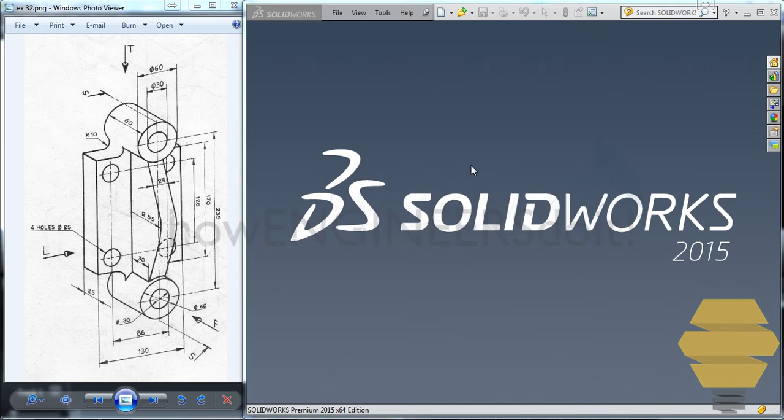In this video, we'll work on exercise number 32. To start off, we'll go to File, New, and open a new part template. Once it's open, let's go to the sketch, select the sketch tool, and then select the plane to start sketching on. In this case, I would select the right plane.

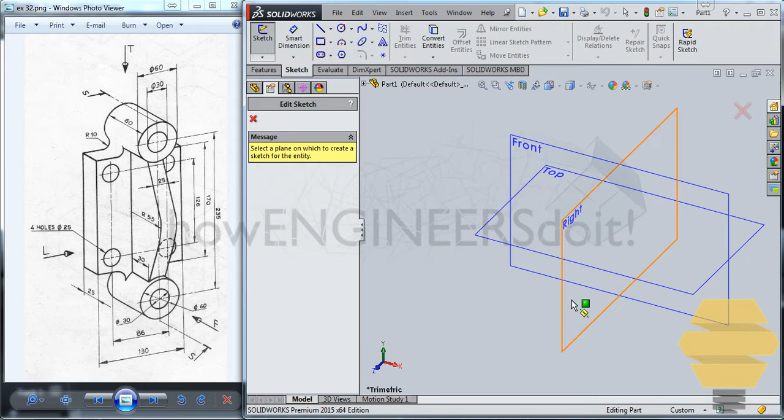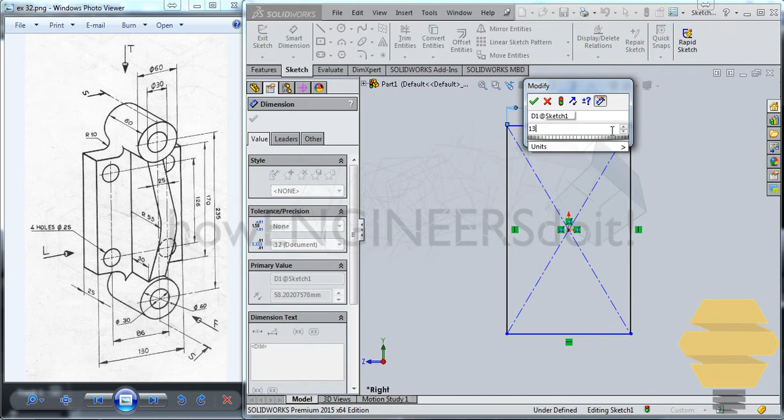Let's start doing the sketch of this particular geometry. Let's go to the centered rectangle tool, click here, drag it outwards, and go for smart dimension. Dimension this portion, that will be 130, and this portion will be 170.

Exit the sketch and then go for feature extrude boss and base, and this thickness will be 25. Double enter will confirm that.

Now we have to create 4 holes, so select this face, go for the sketch again, and then create a circle. Go for the dimension and start dimensioning the circle. That will be, as you can see here, 86, so 86 divided by 2 will be 43. If you're not able to see, this is what I'm talking about.

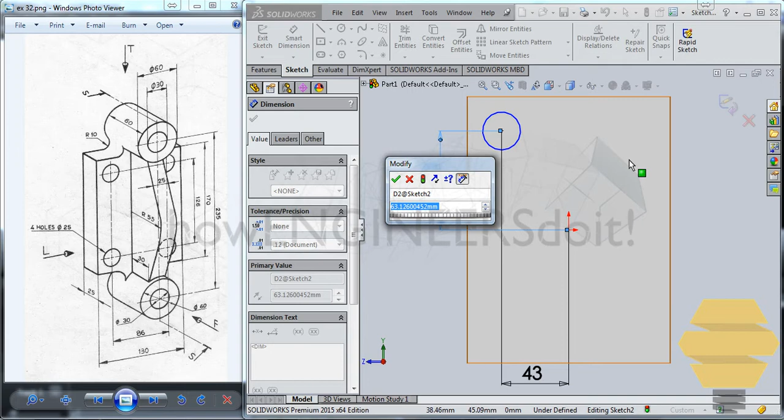Now this is 126, right? So we'll just select the center, and go here and select 126 divided by 2. So we have that circle being placed on a particular place where it is constrained. Also 4 holes of diameter 25, so diameter 25, double enter will confirm that hole there.

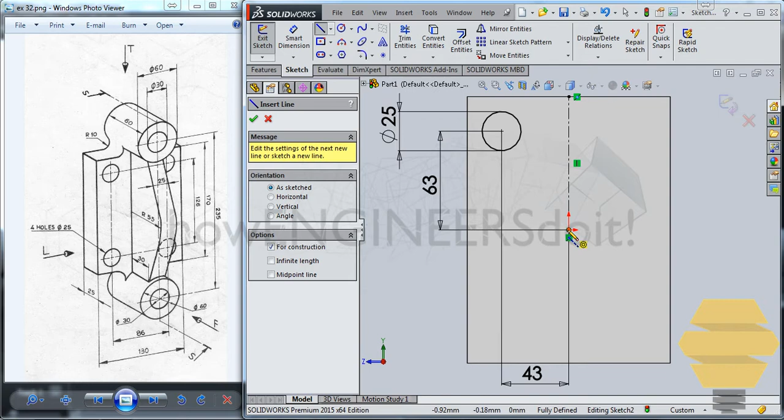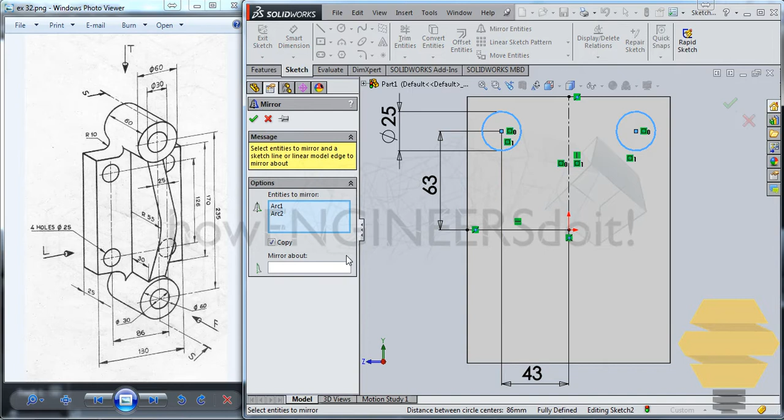Now what we can do is just create axis lines, one, another axis line here, two, and select this circle here and go for mirror entities, select the mirror about, select this, so you can mirror it. Now select these 2 circles here and then go for mirror entities, select the mirror about, and select this axis. Click on the tick mark and all 4 circles have been created.

Exit the sketch now and then go for extruded cut, and go for up to next here. Click on tick mark and that'll confirm the hole. So we have the basic shape here ready.

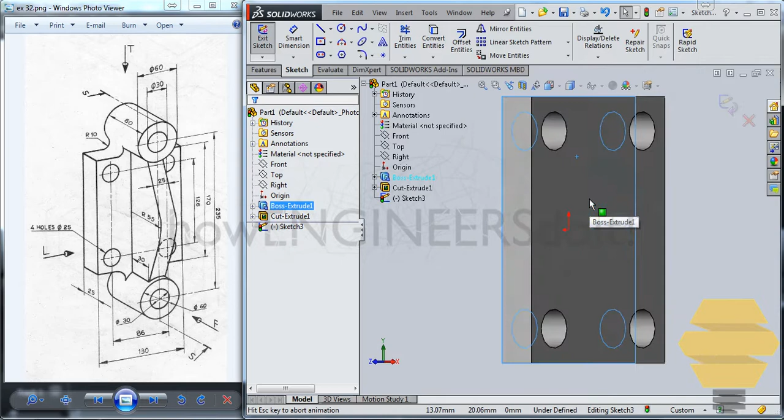Now we need to create these 2 faces or geometries. To do that, let me select this face here and go for the sketch, Control 8 to normal to, and now we can create a concentric circle.

Alright, now let me constrain that. That's diameter 30 and diameter 60. Now that circle is lying at a distance of 235 divided by 2, so 235 divided by 2. Alright, now what else do we have to do to constrain that?

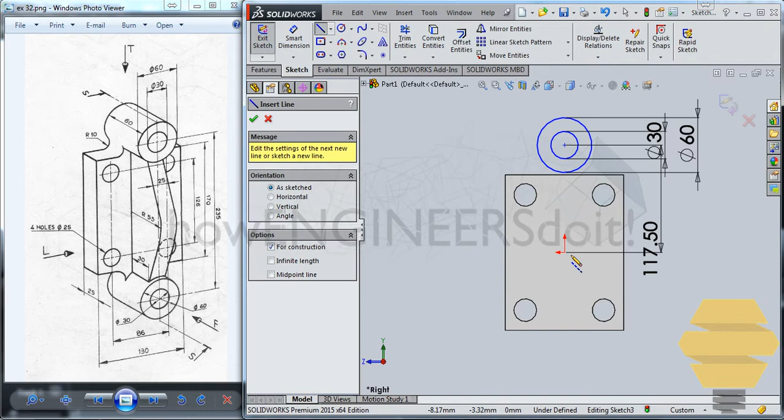I'll just draw a center line. Okay, now as you can see, it's fully constrained. Let me exit the sketch now.

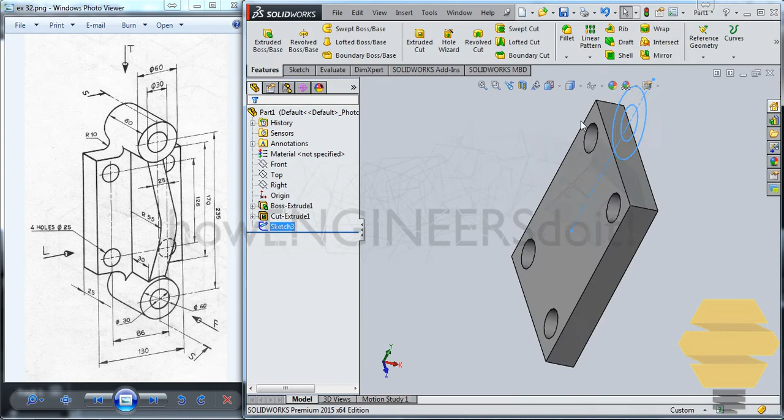Let me do an extrude boss and base, reverse direction, and that'll be 60, right? 60, double enter, we'll confirm that.

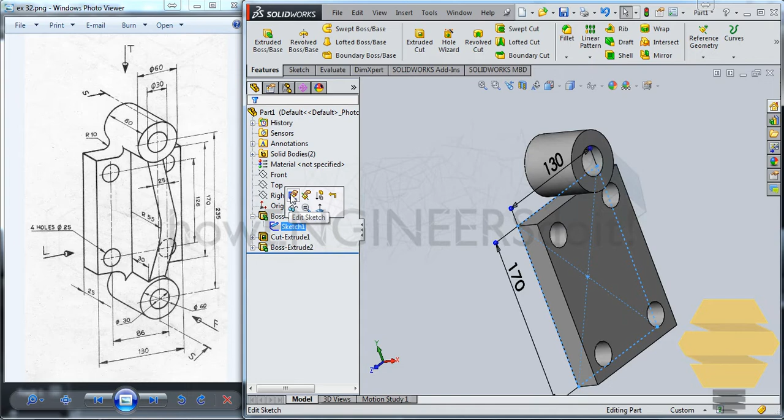Now what we can do is we'll just go back to the previous sketch, this sketch here, edit sketch, and I'll press Ctrl 8 for the normal view.

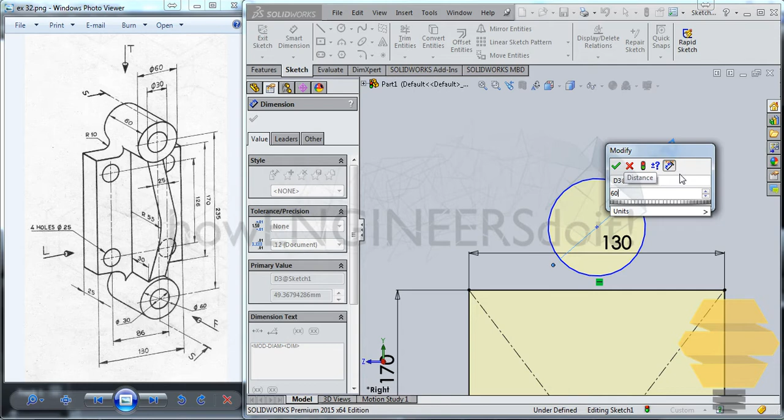Now let me just draw the outer circle here, and dimension that circle. That'll be diameter 60, right? Diameter 60, and that circle is at a distance of 235 divided by 2. Now that circle should be at the center, so I'll just use a center line and draw this so it's fully constrained.

Now let me select this circle and select for construction, so that will not be considered while the sketch is produced. Now we'll do this portion here, so that's the reason I created the circle.

So what we can do is radius 10, right? So I'll create a circle of radius 10, so diameter 20, and then I'll select this circle and this edge and go for tangent, tick mark. Select this circle and this circle and then go for tangent, tick mark.

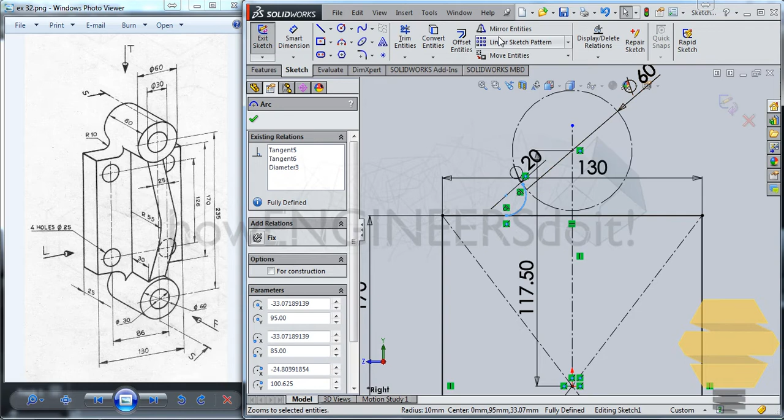Alright, now I'll just erase this portion. Select this circle here and then go for mirror entities, select this face, remove this, and create the mirror about here, click on the tick mark, so that's created.

Now you can finally select this and remove the for construction, and then go for the trim and just trim this portion, and also trim this portion and just trim this portion. So finally we have a particular shape there.

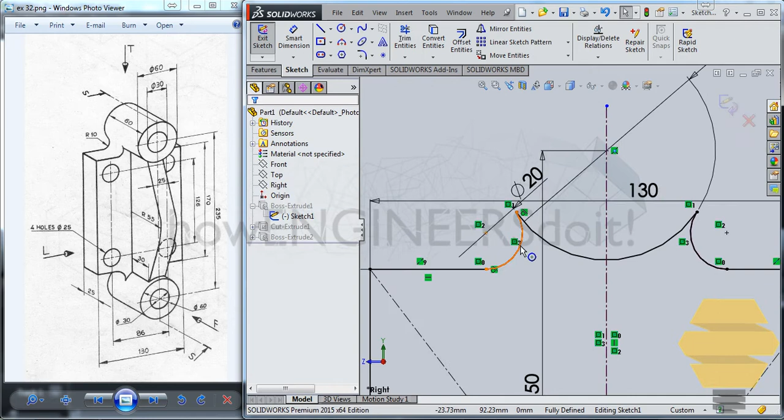Zoom in a little bit, select this circle and the circle, arc, oops, Control 8.

Now we need to mirror this about this axis, right? So we can just go for mirror entities, mirror about, and select the top plane. It's not taking top plane as an option, so press escape and just go ahead and create a center line again.

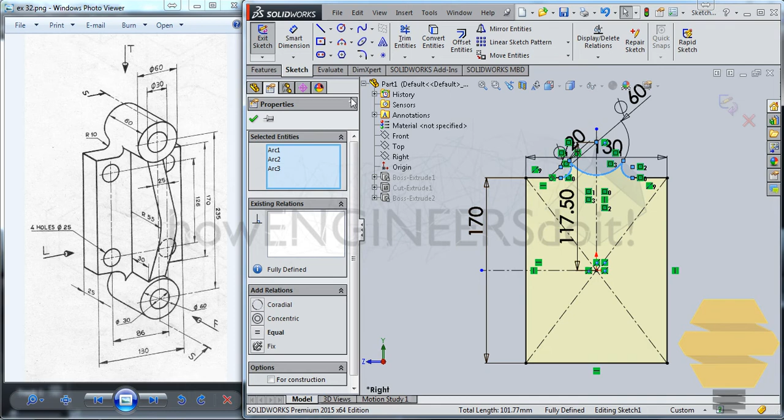Then select these geometries that you would like to mirror, and then select mirror entities, go for the mirror about and select this, click on the tick mark, zoom in a little bit, and finally trim this portion.

Alright, now select the tick mark and select exit the sketch. Has a warning which may cause subsequent features to fail. Would you like to repair? Continue, ignore.

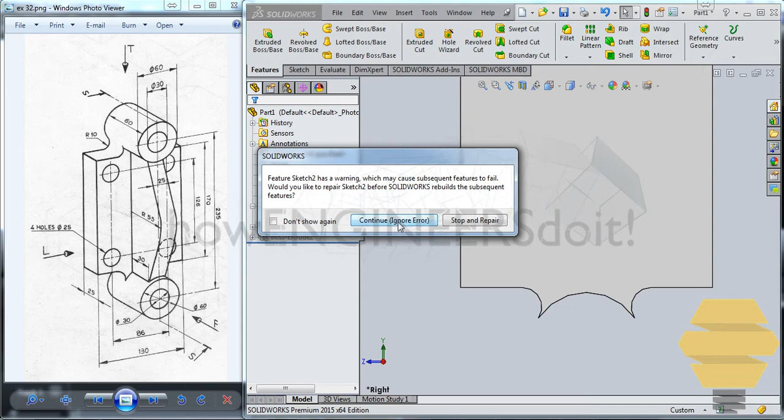So what was the problem? Now, I don't see any problem here. The model has come well.

Now what I would do is select this boss, extrude boss and base, this one, and then go for mirror, right? Where is the mirror? Yeah, mirror, and then go for the top, click on the tick mark.

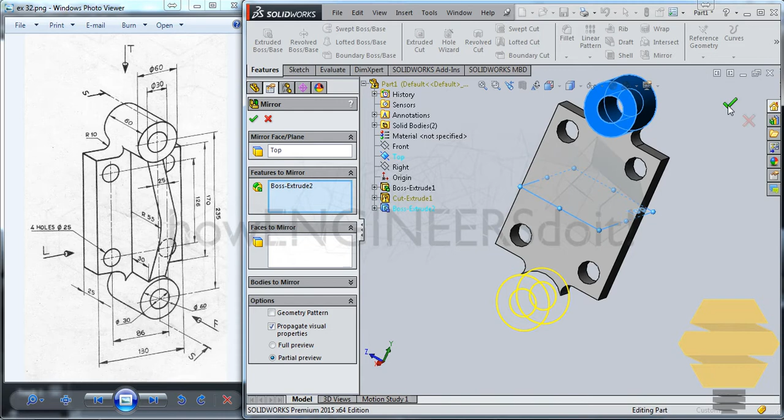Maybe pattern if appropriate, make a pattern of bodies instead. Okay, they're saying pattern of bodies. Select this, and then go for a linear pattern.

And the direction will be this, and the distance will be how much? 235, right? Distance will be 235.

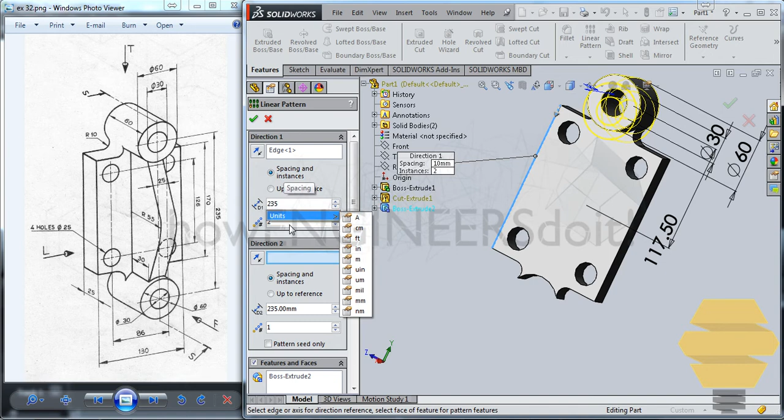Doesn't seem to move, so just forget this. Okay, here you give 235. Yeah. Now click on the tick mark. You can see that that has been created.

Now finally, we have to do this rib kind of thing there, right? So to do that's very simple. So you have to just go for the right plane, not the right plane. Yeah, the front plane. Go for the front plane.

Go for sketch. And now you can simply select this edge and this edge here and go for convert entities, and then select this edge and this edge again, and then go for construction.

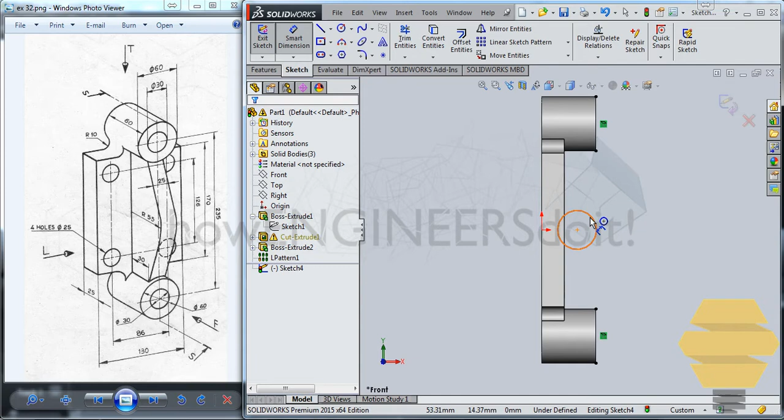Alright, now we can simply create a circle and dimension that circle for radius 55, so that will be 110 diameter.

Alright, now select the line from here, just draw a line here, and also the radius is 55 from this point, right? So select this and this, then go for coincident, and then select this and this and go for tangent.

Also select this and this line, then go for midpoint, tick mark, then select this line. No, I'll just trim this portion.

Now select this line and then go for, before doing that I'll just create an axis line so that I can do the mirror.

This is not horizontal. Yeah, now it's horizontal. Select this line here, go for mirror entities, select this as the mirror about. Now we have that coming there. Now we finally need to complete this.

So to complete it, I'll select this and go for convert entities. Finally, we'll just draw a line horizontal, and use the extend entities and extend this, trim entities and trim this. Finally, select this line, go for mirror entities and select this.

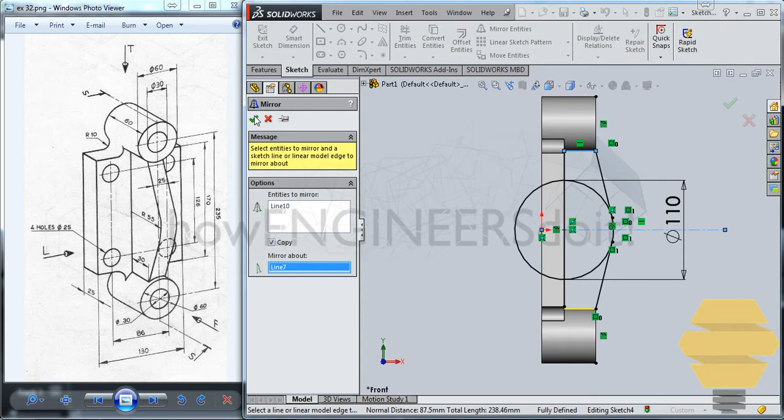Mirror entities and select this. Click tick mark, go for extend entities and select this line. Finally, use a trim and trim whatever portion that you would not require. Click on the tick mark, exit the sketch, and then sketch is over defined, sketch number 2.

Okay, let's just ignore this as of now, and let's just go for features, extrude boss and base in both directions. So it's 25, so 12.5 on both directions. 12.5 and 12.5 will do.

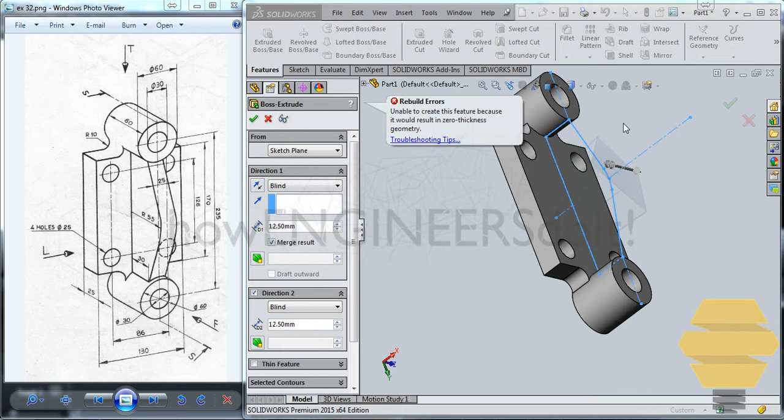Unable to create this because of zero thickness geometry. Okay, so I think there is some unwanted lines in that sketch. So let's just analyze the sketch once. Control 8. Zoom in a little bit.

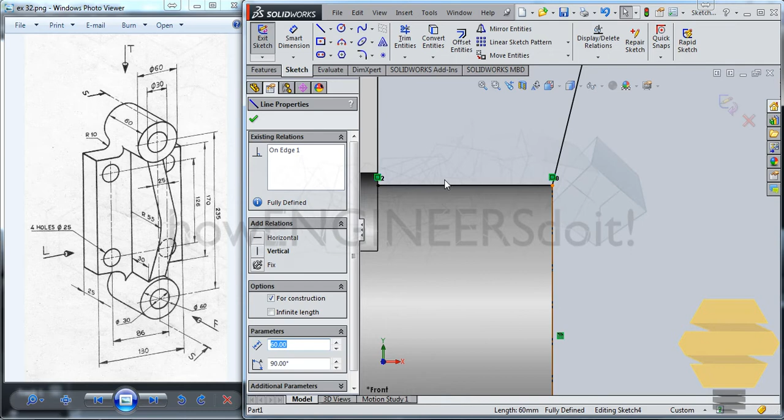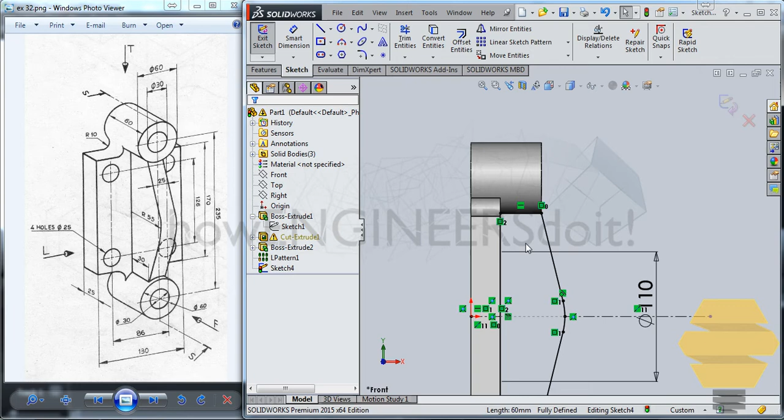This is for construction line. Control middle mouse button. Try to analyze if there is any line which is not right. Let me do one thing, let me delete this unwanted lines. Let it be under constraint.

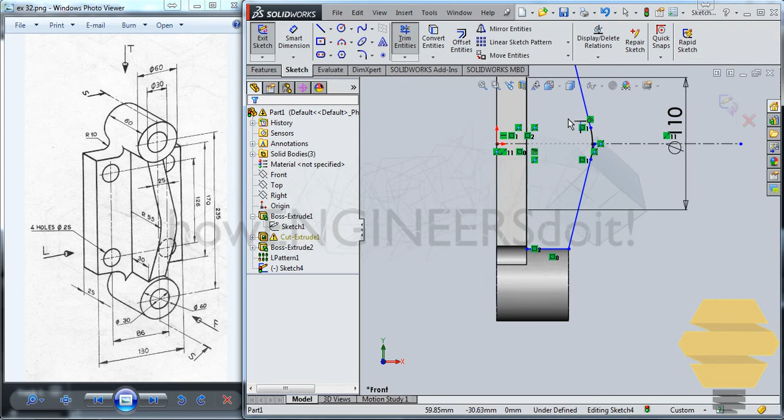Extend. It's already extended, this is already extended. Okay. Trim, trim, trim, trim. I don't know, I don't find anything wrong in this.

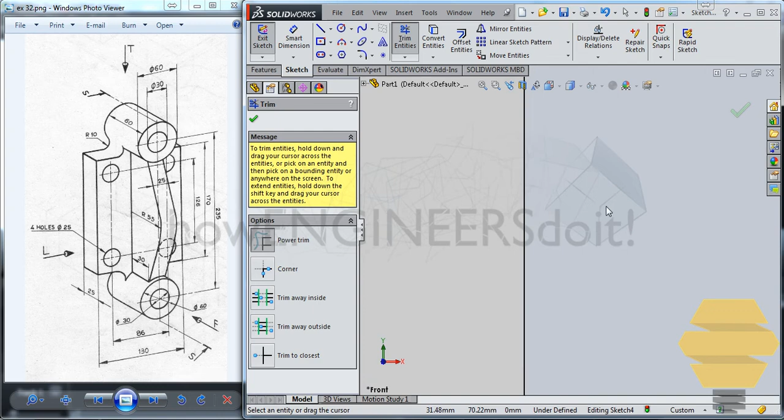It's under constraint now, so it doesn't matter. Let's just find out what the problem is. Exit the sketch. Sketch is over constrained, sketch number 2. Okay, sketch number 2 is over constrained, they're saying. Okay, I'll just go for edit the sketch.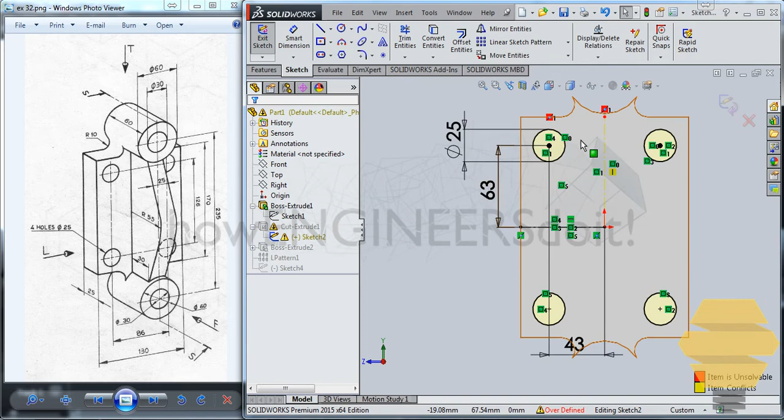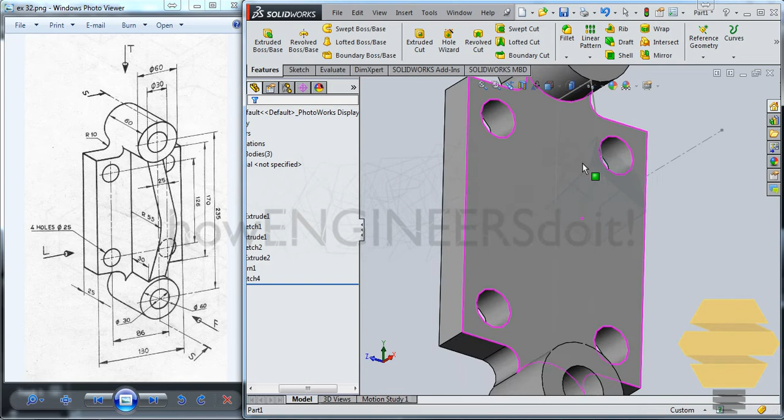Control 8. They're saying that it is over constrained. I don't understand. Exit the sketch now. Okay, there was an extra line on that, and that's the reason it was creating some problem. Now just select this line here and go for extrude boss and base and give 12.5 on both sides.

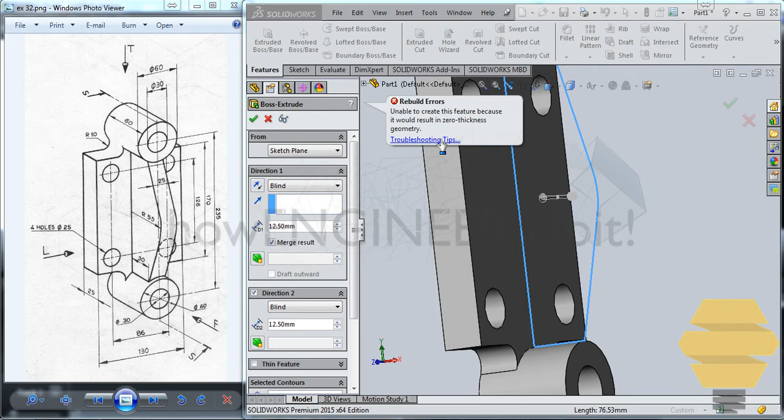Tick mark. Oops. Unable to create this feature because it would result in zero thickness geometry. Seriously, I don't see any problem in the sketch.

Okay, there is one thing that I can check. Maybe I would increase the length over here so that there won't be any gap between these when it's extended. So let's just try that out.

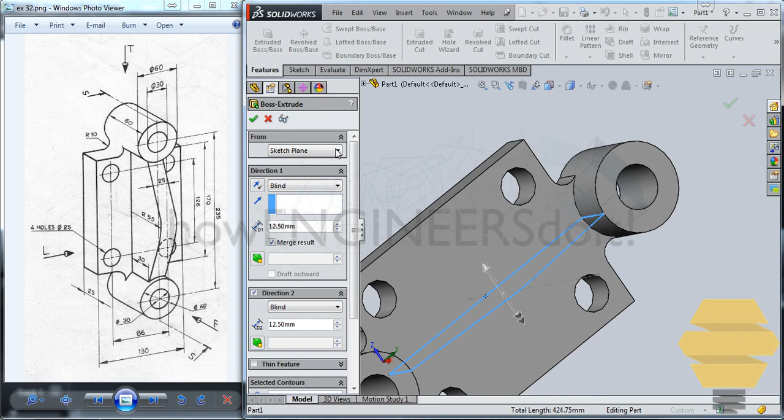So I would maybe go for this and go for edit sketch, Control 8, and what I would do is just select this and extend it a little bit. Select this line here, go for construction, and do the same thing, or else just mirror this 1, 2 and 3.

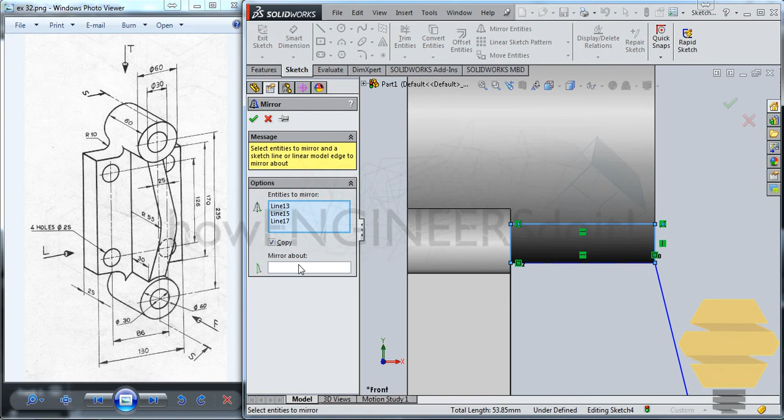Just go for mirror entities and go for mirror about. Select this, tick mark, and select this line here, go for construction, exit the sketch.

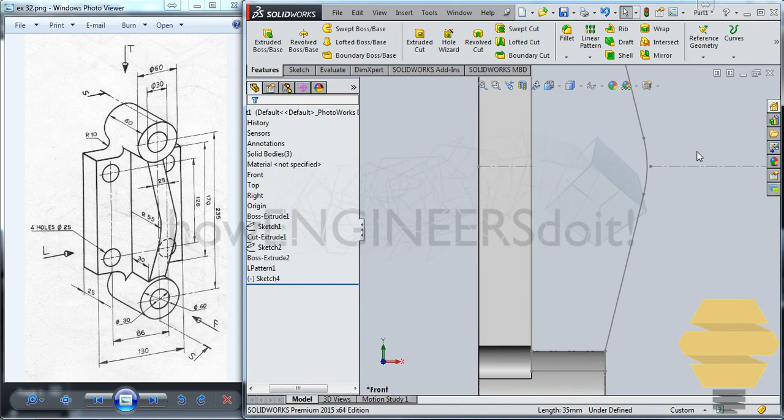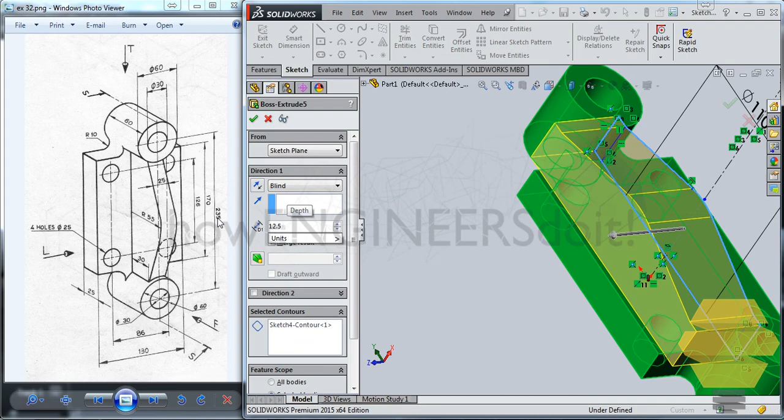Now you can simply select this geometry, go for extrude boss and base. Let me just give, okay, it's coming, right? Edit feature, go for 12.5, double enter, it's coming. So now let me try edit feature and the other direction, 12.5, it's coming.

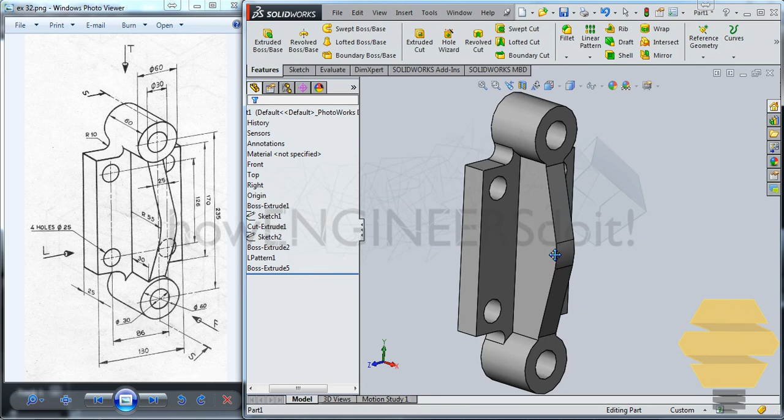Alright, so that was a problem with this, and I think the tutorial was a little longer, but as we face the problem, that's when we learn a little more about the situation and the software, right? So that's it. I think the reason why that was not getting extended was because there was a gap that was getting created here when this portion was getting extended. So as I've extended the sketch a little more towards this solid object, the gap was getting filled.

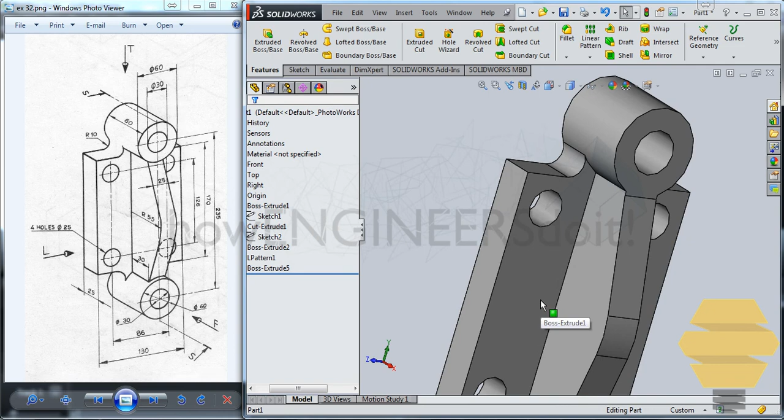But in CATIA, it doesn't create any such kind of errors. And mostly whatever error CATIA throws, we tend to find out what the error is, but in SolidWorks maybe this is a bug. So I hope you enjoyed this tutorial.